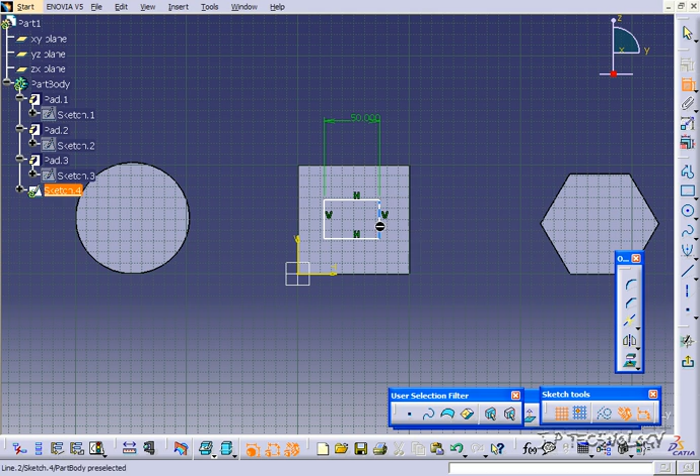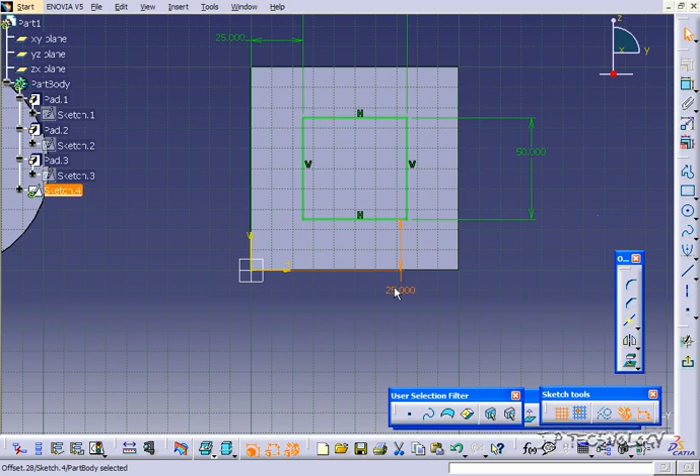So to start off, let's do one on this face here. Let's click this face, click Sketch, and let's sketch a square on the face here. And let's dimension it to 50 by 50. And then let's dimension it from the origin here. So let's make it 25 by 25. Now we've got our sketch right in the center of the solid body. So let's exit this workbench and let's apply the drafted fillet pad.

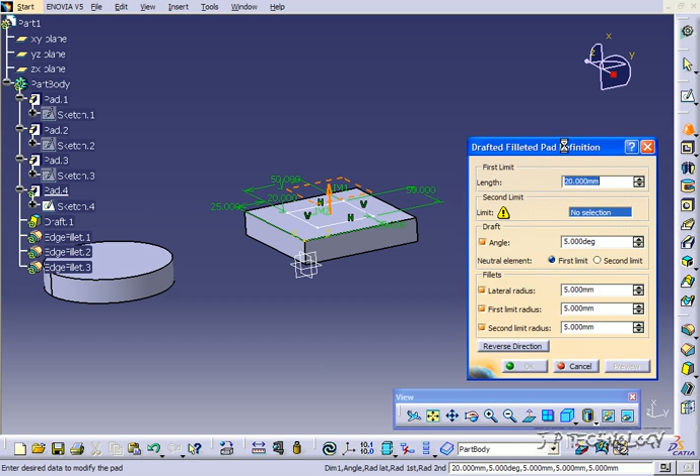So click on the sketch and let's click the drafted fillet pad, and we get the drafted fillet pad definition window here. So we're going to have to go through it and add and select the parameters. With this type of pad though, you're limited to only doing a dimension. So for the length, you're not able to do an up to or up to surface with it.

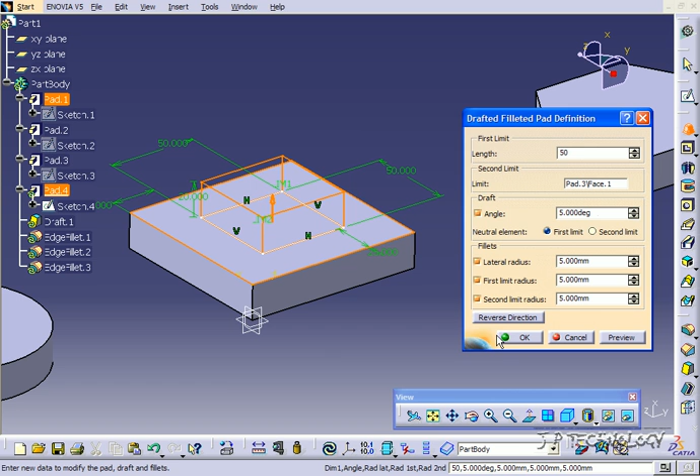Now for the second limit, click the face that you're extruding it off of. So click this face here, and you're able to toggle on and off if you want a draft angle or if you want the fillets. So for now, turn everything on, and everything's set at 5 degrees and 5 mm. Leave that, and let's put this up to 50. Now let's click OK and see what we get. And we get our extrude with the draft and the fillets.

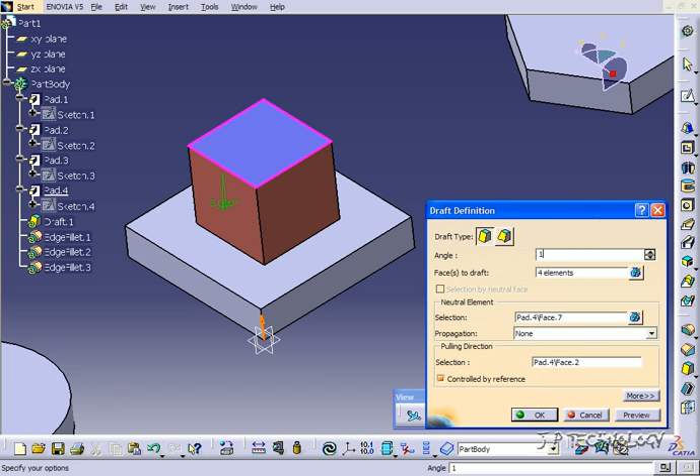Now if you notice, with the draft angle of 5 degrees from the top point here, it drafts it out. And when it creates this feature, you're going to get a pad, a draft, and all of the edge fillets. So from there, you're able to change the pad, the draft, or the edge fillets just by clicking on them. So let's change the draft angle. Let's double click on it, and let's change it from 5 degrees to 10. Click OK. And now you can see that it's kicked it out much more.

Now let's delete one of these fillets. And you can see that it takes it off on all those edges. So you're able to go in and modify the pad, the draft, and the fillets after it's been made. So instead of getting back into this one menu for the drafted fillet pad, each of them creates its own feature under the part body.

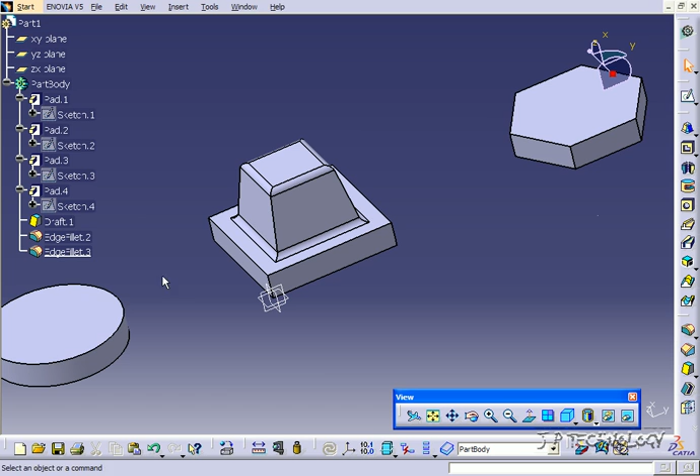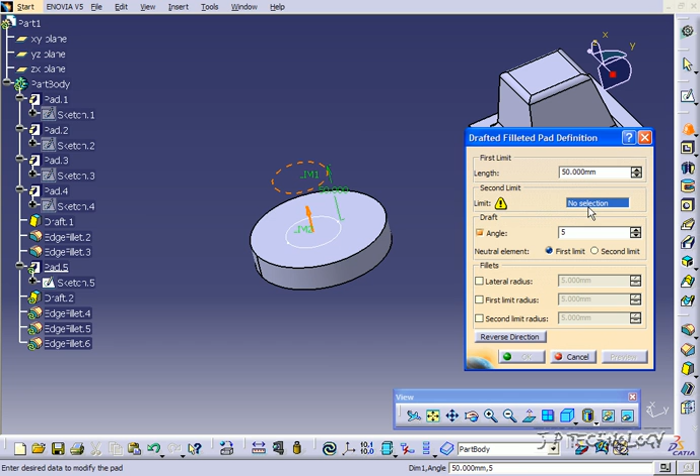So now let's do one on the circle here. Let's click this face, click Sketch, and let's just sketch a circle close to the middle. Don't worry about the dimensions. And we'll go out, click on the feature, and this time let's only make a draft. So we'll take off all the fillets, and we'll make the angle here 5. Now for the limit, we're going to choose this face here, click OK, and now we've drafted this out just 5 degrees with no fillets.

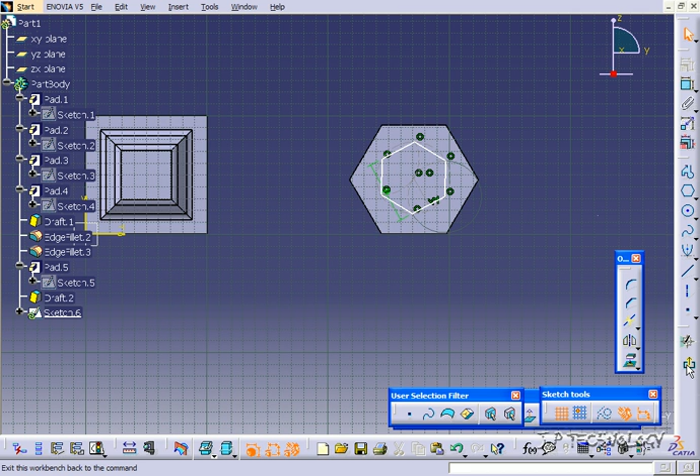Now let's do one last one on this face here. So let's click it, click Sketch, and let's use the hexagon. So click and pull it out. Now let's go back out and let's use the feature. This time let's unclick the draft angle and let's click this face here. So what we're going to have this time is just fillets and no draft angle. So let's click OK. And that's exactly what we get. No draft on it, just the fillets.

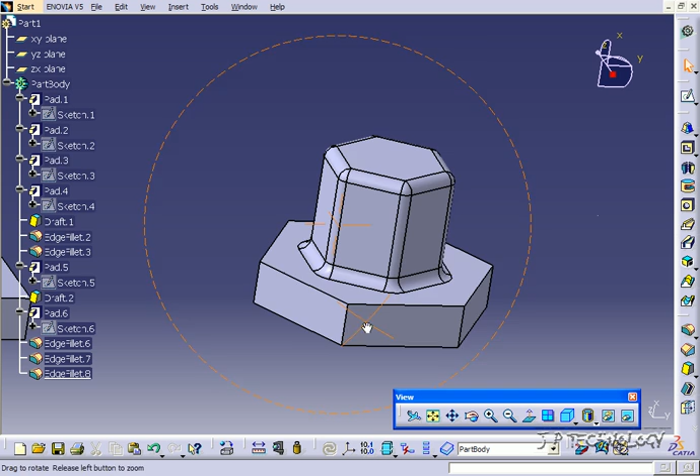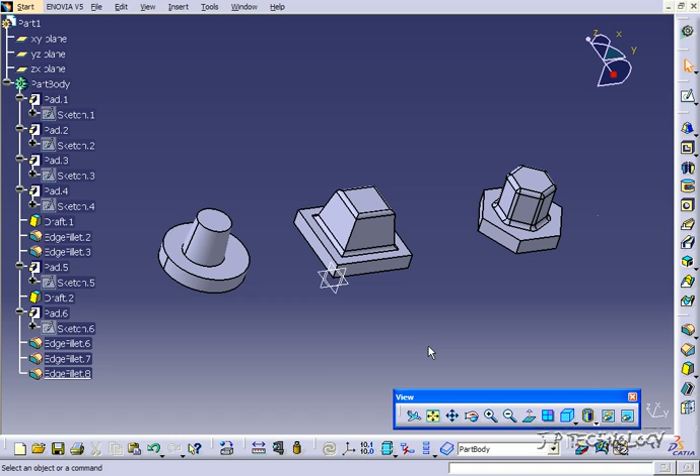So this tool allows you to incorporate the drafts, the fillets, and the pad all in one step. So like I said, it's a time saver, as rather than going through 3 separate steps, all you have to do is one step and you get your 3 features from the one sketch. And that concludes our tutorial on how to use the drafted fillet pad within CATIA V5.